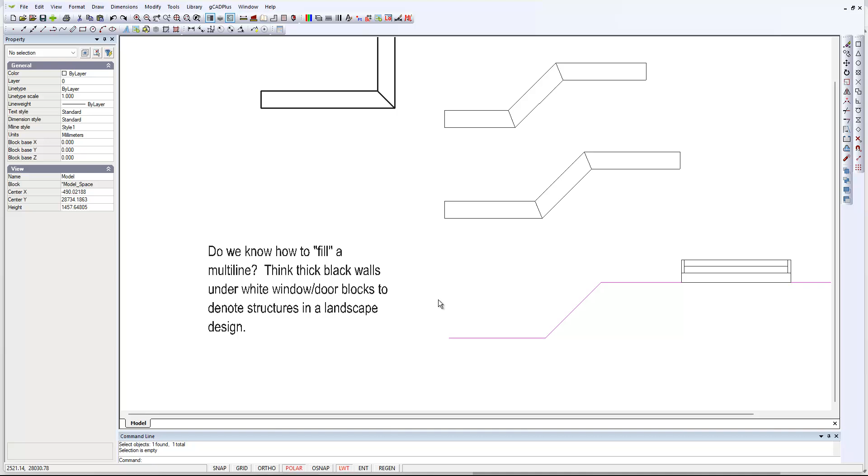Well, one of our users has posed the following question. Do we know how to fill a multi-line? Think thick black walls under white window door blocks to denote structures. A multi-line is a relatively complex shaped entity, but it's a single entity.

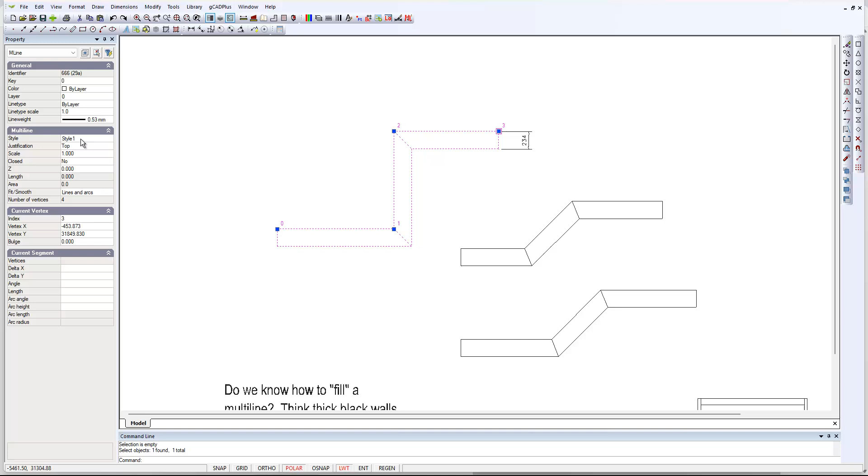If we just select it, it just says M line. This was in a style called style 1, and its line weight is set to 0.53, so it's thick. I've set it up so that it draws a line 230 wide for a double brick wall, but I'm not able to apply a linear dimension to it.

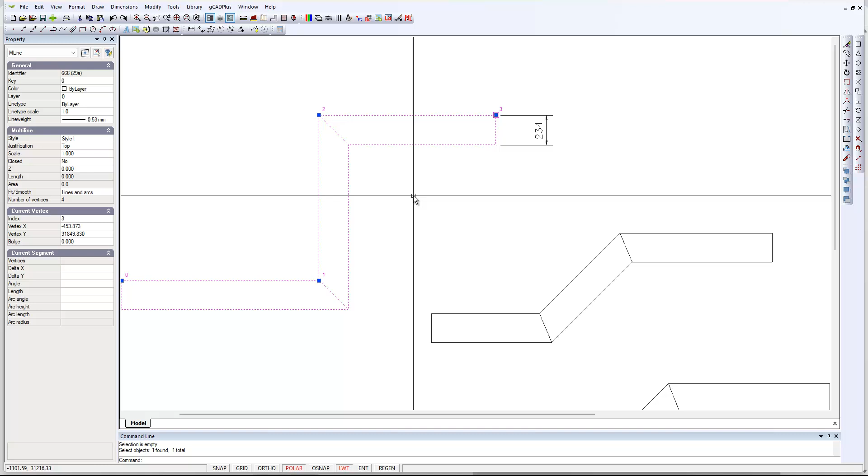I've just had to guess where it should be, because the multi-line itself can't be exploded to click the end point here and an end point there. They just don't exist. So even though you select a line and click explode, there's no difference in the result. So it is relatively complex.

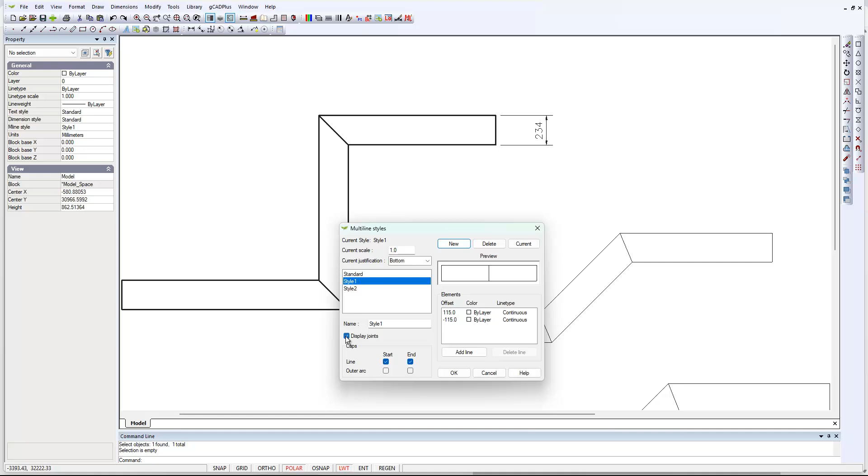If we go to Format and Multi-line Styles, here's style 1, and it's set with an offset in one direction, 115, and 115 in the other, making a 230. I've said I'll display joints. That's the joint running through here, and a start and end cap. So I can adjust that; if I took that one off, the joints disappear.

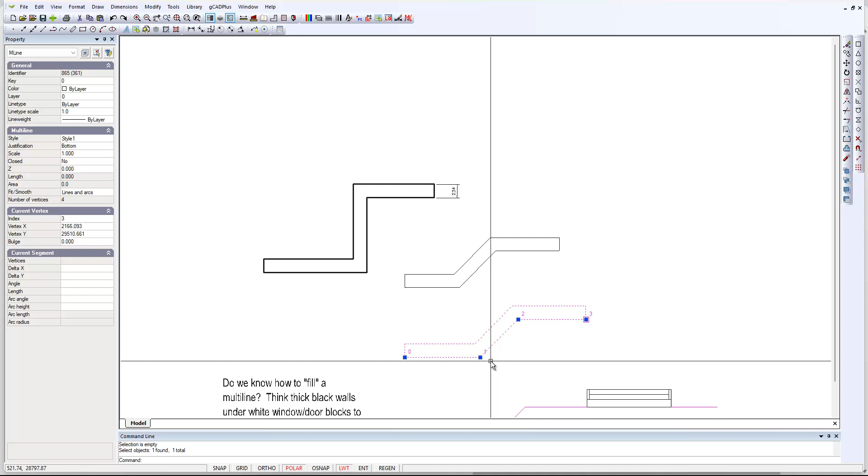So what else should we note? You can have a different style of justification. This one's justified middle, the first one we looked at is justified top, and this one justified bottom. So you can control quite a lot in a multi-line. Now the question is, how might we answer our user's question?

I've drawn a line, or a series of lines; imagine this is the wall. If we had a multi-line style that was 230 wide, and we set it to bottom, we should be able to draw a line over here. And if we set our line weight to say 0.5 to make it obvious, and then draw multi-line.

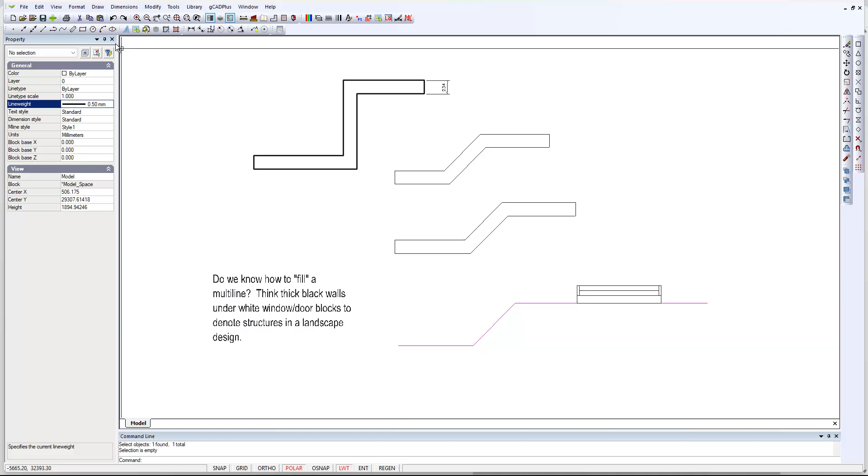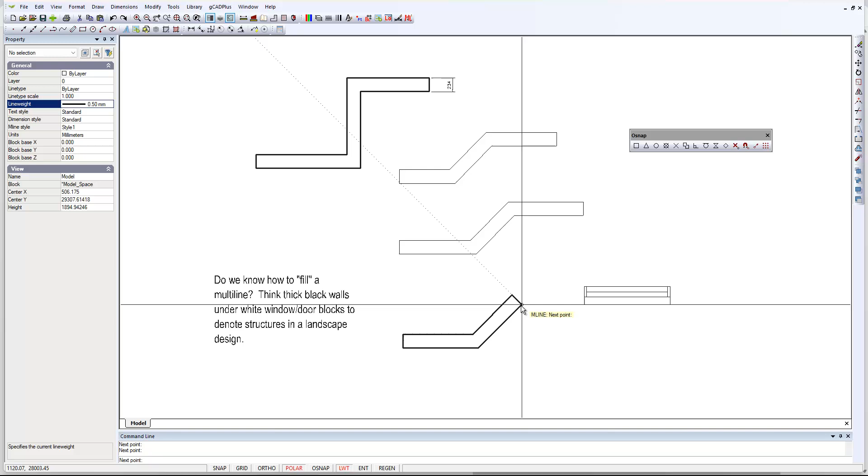And because that was drawn with a line, let's pull this over here, we can certainly snap to that point there, and then for an end point, snap here and snap there, and we can snap again to that point there. So now we have a line with the window showing. That window is a block that's 300 wide, which is why the window is not placed perhaps quite the way we want it.

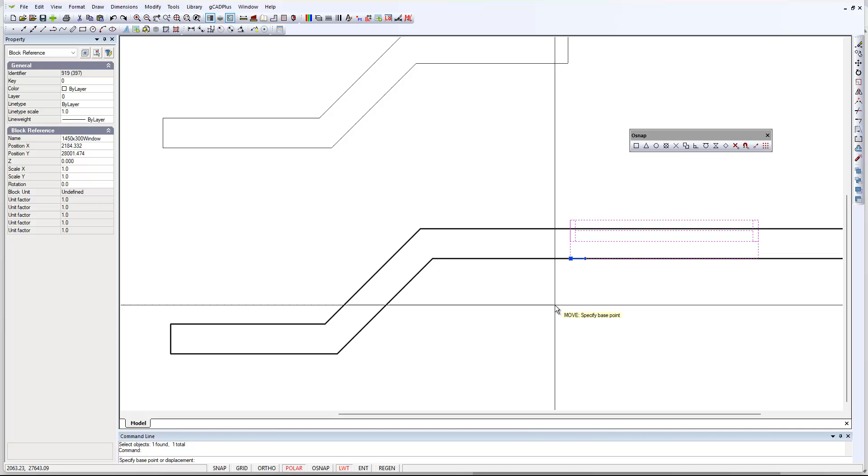We could offset, we could copy it vertically down, couldn't we? So we could copy from that point there, head off in this direction, and say 15 millimeters down. I didn't want to copy it, did I? I wanted to move it, select it, and move. Well, we could indicate a base point, couldn't we? No, we can't. We can't pick that point there because it's not clickable.

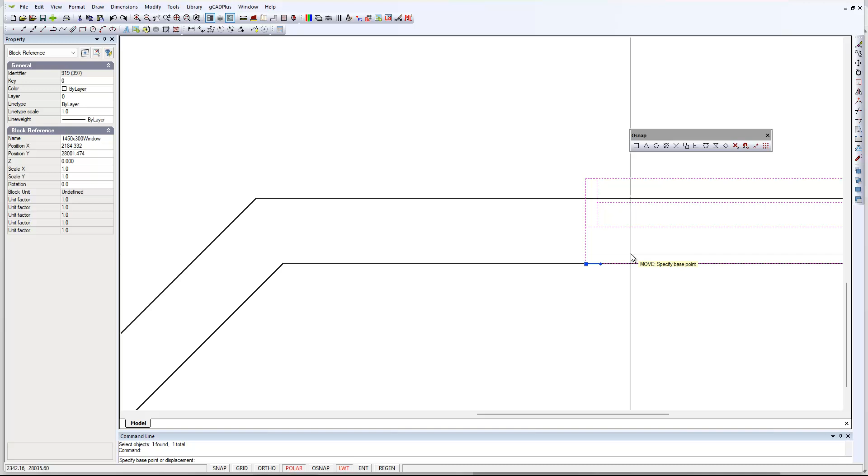So we'll do our calculation. We've got 230 versus 300, so we want a 70 mil move. So we'll move, base point will be there, and we'll move in this direction 70, and we get what we're after. That particular window is jutting out from the wall.

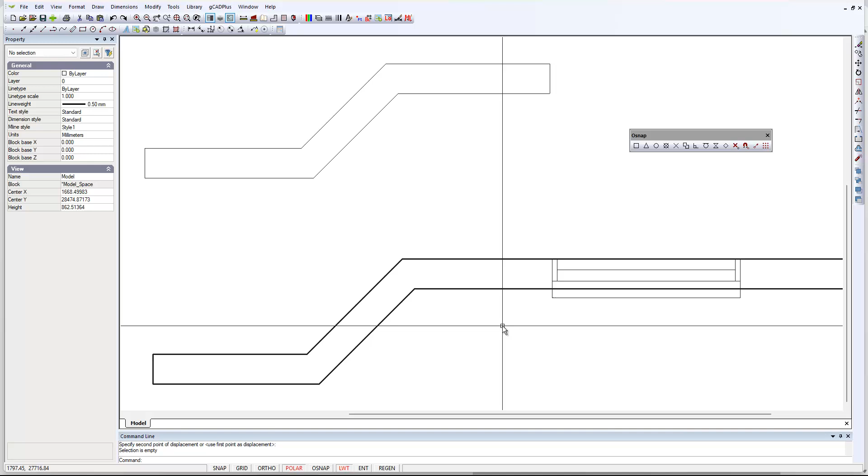Now, I'd be the first to admit that's a little bit clumsy, but I'd suggest creating a block of 230 millimeters if you're working in that way. So although it doesn't quite give us a fill capability, I think we can muddle our way along. I think AutoCAD does have the ability to explode a multi-line, but it is a long time since I've worked with AutoCAD. So that's probably the best we can do, I think.

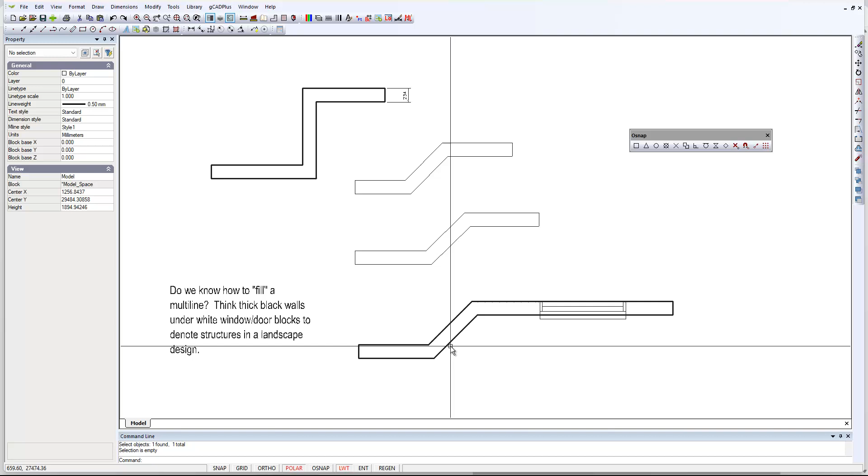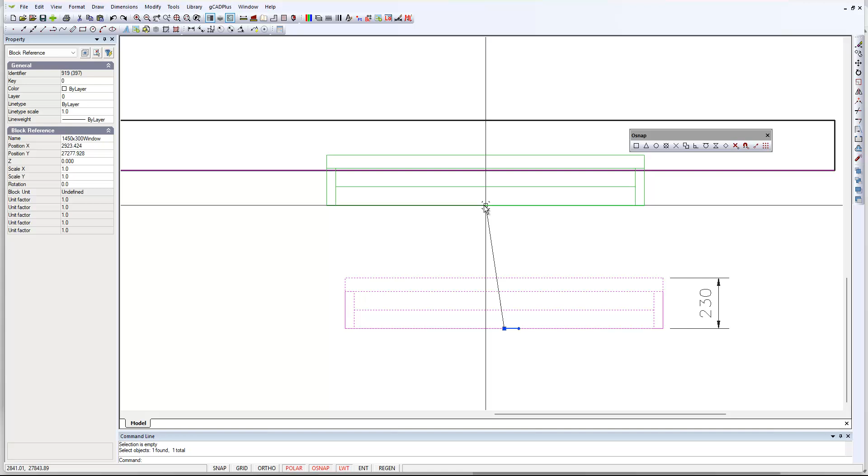I have now redefined the block, so it's now 230 wide, and I've also changed the base point so that it's in the middle there. What that means is I can now simply move that, make that one hot, and then just pick to the middle of that pink line there, and it finds that very nicely, as you can see. And there's our wall with our window in it. You could improve it a little more by trimming on either side of the window, but speed is of the essence, and I think that will do nicely.